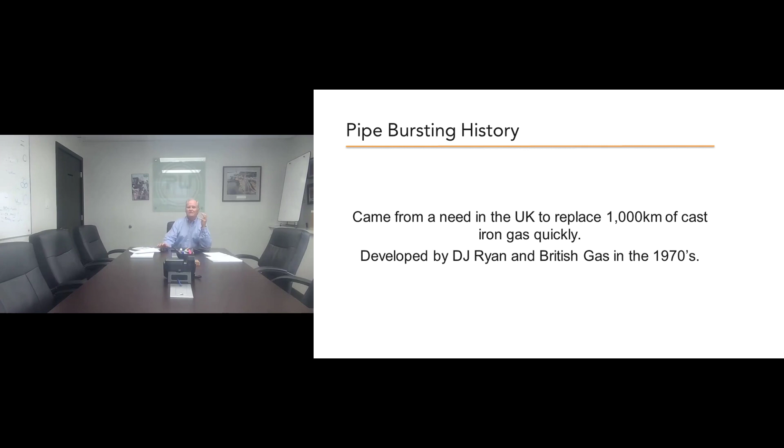Next slide. Caroline, I'm not seeing the slides. I can see them. Yeah, I can't. Okay, anyway, I've got them here. This is the second slide.

Bursting types and materials that can be burst. Okay, bursting type. So there's two basic types of pipe bursting that now exist.

Pneumatic and static. There used to be other methodologies called hydraulic, and there were chain systems. There were lots of different types of bursting, but they've tended to fall by the wayside. As I said, British Gas was the instigator of pipe bursting way back. And when I started in pipe bursting, we actually had to pay a patent fee to British Gas.

You can see on the right-hand side of that slide, there is a picture from TT Technologies, and it shows the various materials that can be pipe burst. Now, that statement is not quite true, because that list of materials there, the top one is cast iron, concrete, clay, reinforced concrete, and asbestos cement. Those can be pipe burst. Steel, truss, corrugated steel, ductile iron, and plastic really can be pipe split. And there is a difference between the two, and we'll talk about that in a few minutes.

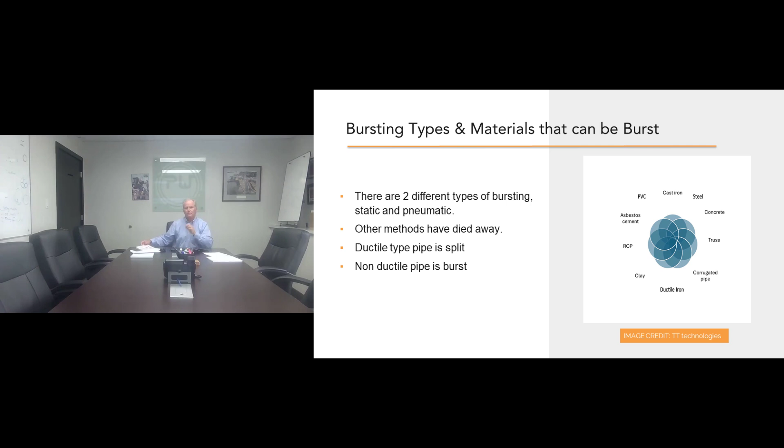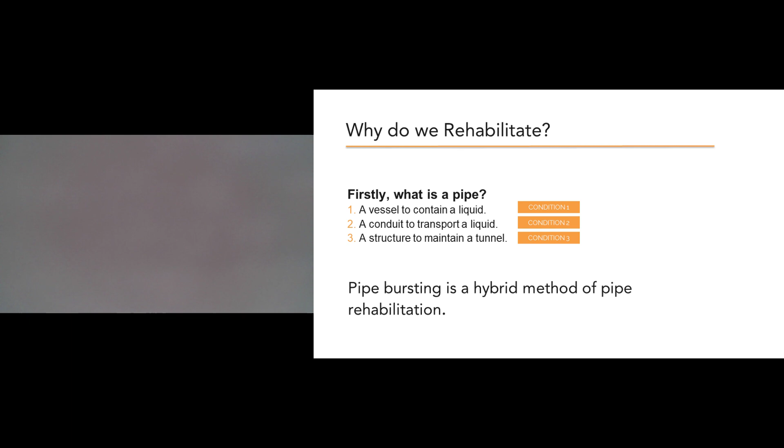Next slide. Alison, I do not see any slides here. I'm sorry. Sorry, David. Did you try to press the slides button at the top? We're on slide 10. Why do we rehabilitate? Yeah, I am looking at the... Sorry, Alison. That's okay. Ah, that's what I'm looking for.

Thank you. Why do we rehabilitate? Well, Alison and I were having a conversation about this a few minutes ago. First of all, let's go back and discuss what is a pipe. There are three conditions that I would consider paramount to looking at a pipe. First of all, it's a vessel that contains a liquid. That's the problem that British Gas had. The pipes were of sufficient capacity, but they no longer contained the liquid, or the gas in that case. So therefore, they failed from that point of view.

But the hole was still in the ground. There was still cast iron there. So it succeeded in conditions 2 and 3, but it failed in condition 1. Condition 2 I'm talking about is its ability to transport a liquid. In other words, is it big enough? And then the third one is a structure. It's a structure to maintain a tunnel. Does it have the ability to maintain the tunnel? That's more evident on corrugated steel pipes and large culverts, and also in clay pipes. Clay pipes tend to fail longitudinally. We'll talk about that in a few minutes.

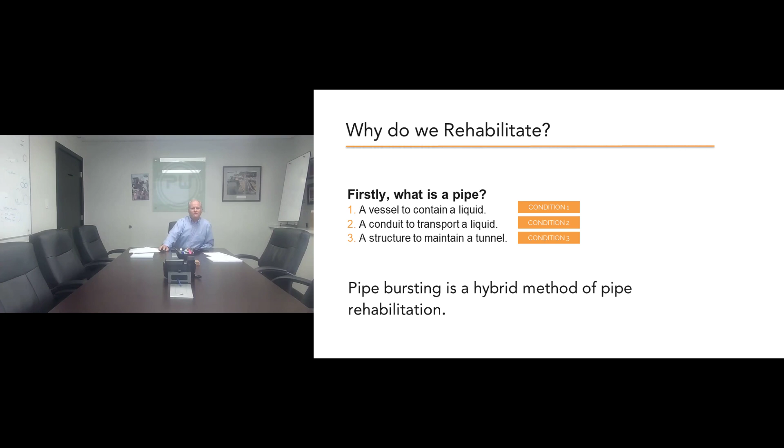So pipe bursting mainly deals with that second condition, which is the condition that the pipe is undersized. It solves that problem. If you want to go back to condition 1, which is the leaking, you can line the pipe with CIPP liners, or you can do sprayed-in-place liners, or you can slip line. There's lots of solutions for that. But mainly the only solution we really have for a pipe that's undersized is to pipe burst it. So essentially what we're doing is we're using the hole that exists in the ground and upsizing that hole.

Now when we talk about upsizing the hole, 25% is common, but the problem is 25% is a very small upsizing in hole. If you look at a standard upsizing, say 200 to 250, or an 8-inch to 10-inch upsize, that's a 50% increase in size. And if you're going 150 millimeters to 300 millimeters, that's a 400%. That's a very large upsize of the hole that you're trying to make. And that's assuming that the pipe itself is just going to shatter and move out of the way. Where you can run into problems is with the ductile type pipes, the steels and the ductile iron; they don't tend to shatter. So there are limitations when you're dealing with that.

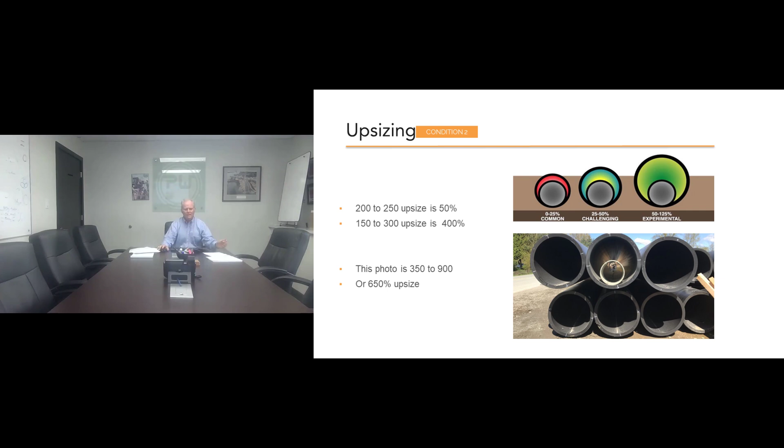The photograph on the bottom here is a project that was done recently in British Columbia, and it went from 350 millimeters or 14-inch up to 900 millimeters or 36-inch. So it was a 650% increase. That is conditioned on the ability of the ground above the pipe to take that energy and to take that compaction. If the ground cannot take the compaction, then you can't do that much upsizing.

And here's a slide we've developed in the last number of weeks. What I'm trying to describe here on the picture on the left is what actually happens. For starters, let me premise that we all know that geotechnical conditions or soils are very varied. All bets are off. You have to be very conservative looking at soils because it changes drastically going through a trench. But we can make some assumptions, and this is a fairly good assumption of what happens. If I look at the picture on the left, my existing pipe is the blue pipe on the bottom. The new pipe I'm putting in is the green pipe.

We have found in 25, 30 years of pipe bursting that very, very rarely do we not have inverts matching. In other words, the crown of the pipe is generally what moves. So therefore, the compaction happens above the crown of the pipe.

If you go back and you look at the trenches that were done, Murphy Pipelines puts them on quite often, you'll see guys digging trenches back in 1900s and 1920. None of that material was compacted. Therefore, the material that was put back in the hole or the trench on top of the pipe, I'm saying, would have probably compaction of maybe 80, 85% maximum. So therefore, it has an ability to absorb compaction, whereas the existing ground would have had a much higher density.

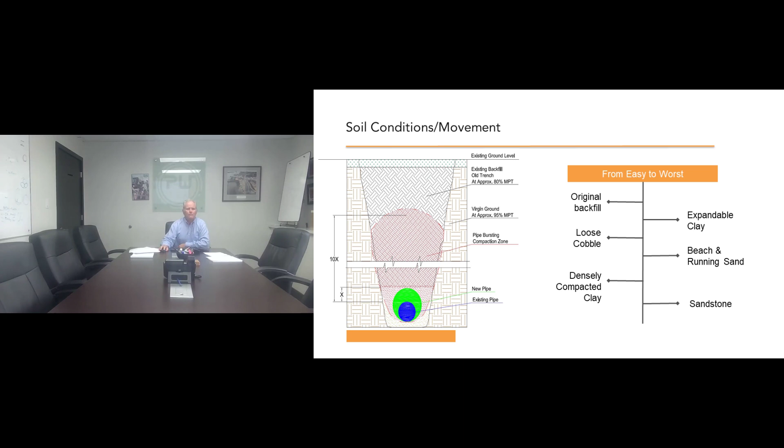When we pipe burst, and it doesn't matter whether it's pneumatic or static, you are using energy to do 3 things. You're using energy to break apart the old pipe. You're using energy to displace the soil that we just talked about now. And then you're using energy to pull the new pipe in through the hole that you've made by the cone when you've displaced the soil.

Depending on the soils and depending on its ability to move back around the pipe and adhere to the pipe and cause friction, you may or may not want to add lubricants in there to try and isolate the new pipe from the surrounding soils and allow that pipe to slide through. You cannot do much about the energy that you need to break apart the existing pipe, or you can, and I'll talk about that in a few minutes, but you can't do much about the soil, but you can do something about the lubrication and the friction on the pipe behind. So lubrication is a good example.

Now, generally on the smaller bursts, the 200 millimeters, even up to 300 millimeters, you generally have enough horsepower to pull through. It's when you start going 400, 500, 600, 900 millimeters, that's when you really need to watch how you use your horsepower, your pulling power, and try and lessen any areas that you can lessen to allow you to have maximum energy to both break apart the existing pipe and to pull in the new pipe, to make the hole in the ground for the new pipe to come through.

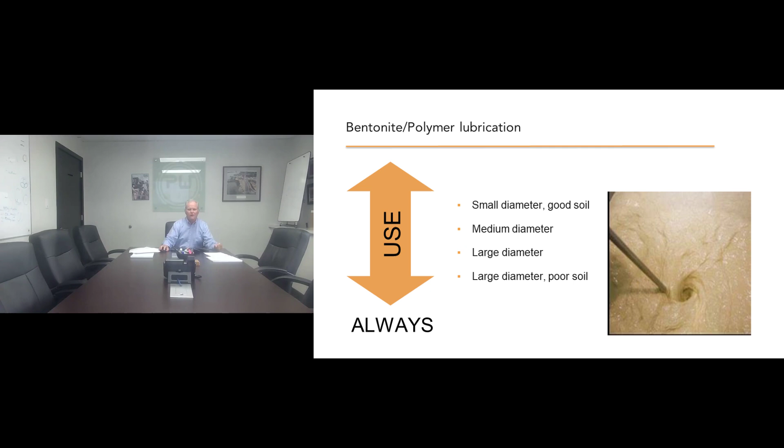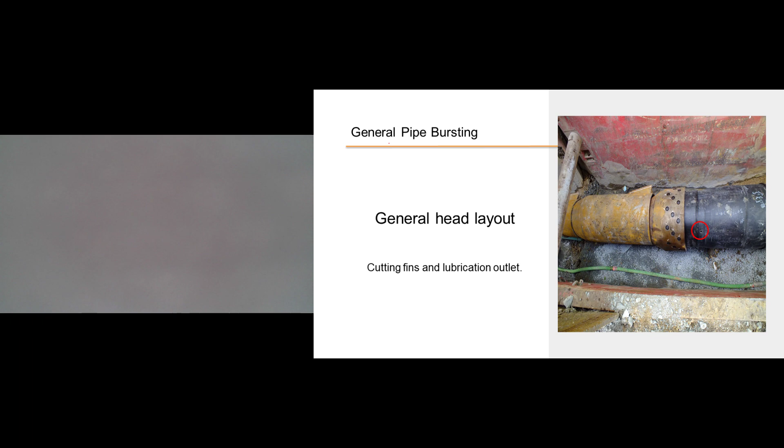So I'm still on general pipe bursting. I haven't deviated off into the pneumatic versus static yet. So this is the general head layout. What we've got here is the bursting head, and you can see it's steel cones. In this case, it's a static system. If there's a pneumatic system, there'd be a hammer inside that hammering.

I just talked about the energy to break apart the existing pipe. Here you can see the cutting blades on the top of that, over kind of on 1 o'clock. If you're looking at it from behind and looking up towards the front, cutting blades are at 1 o'clock. So by putting a cutting blade on there, you are cutting the existing pipe. Therefore, you're hopefully using less energy to cut the pipe and get it out of the way, and you're using most of the energy to open the hole up.

I've also circled in there a hole where the lubricant comes out. So that lubricant comes out just behind the head and will hopefully lubricate the whole new black pipe that's there and lower your friction on that.

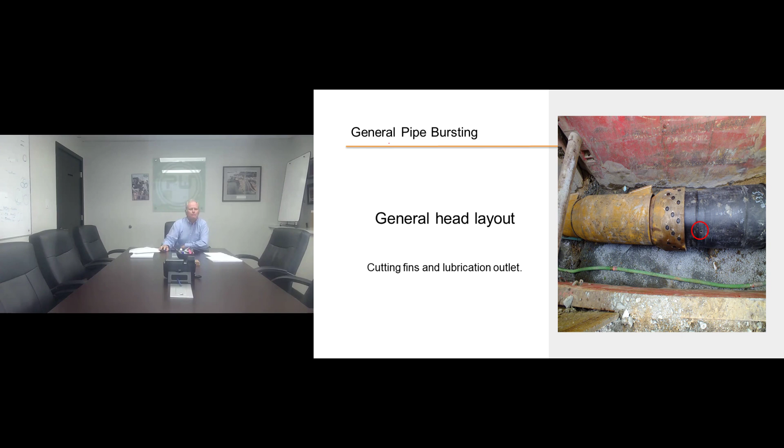Now we're going to get into the pneumatic process. Both processes are quite common. We tend to find that the pneumatic process is more common in the southern US, static in kind of California, and then the static system is more common as we come north in the US and into Canada. So the pneumatic system is a hammer. I'll give you an example of this.

TT Technologies has a tool called a Hercules. It generally can burst up to, say, 250 millimeter pipe. It's just a regular working tool because the vast majority of pipe that we're dealing with is 200, 300 millimeters, 250, that kind of size, which is 8, 10, 12 inch. That tool is, I'm going to guess, about 400 kilograms, 800, 900 pounds. There's a hammer in there that is about 150 pounds or 75 kilograms. It goes back and forth at about 70 strokes per minute.

When it hits the front, it's steel on steel, so there's a very sharp smack when it hits the front. Then as it comes back, the air channels are set up so the air slows the hammer down as it's coming back, and then it hits a rubber cushion on the back. Therefore, the net result is that, depending on the soil, the net action of that hammer is, say, 75 mils forward, 25 mils back. And so the air coming out of that compressor on the right-hand side powers that hammer to move back and forth at over a beat per second and move forward and break apart the existing pipe and push the soil out of the way.

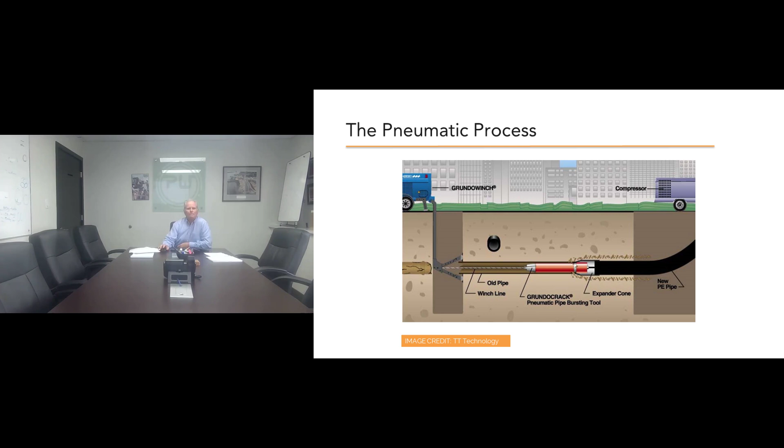So the pneumatic process, we go back and we've got the winch. It provides constant tension, as I said. So it's what we call a twin capstan winch. It's not a geared winch, because the hammer action will slow down and speed up depending on the soil there. So it can slow down and completely stop for a while and just hammer away trying to displace soil. If that was a mechanical type coupling onto a winch, you'd stall the winch out, which is not a good idea.

So it's a twin capstan thing that will allow slip depending on the tonnage you put on there. The winches out of supply, they've got 5, 10, and 20-ton winches. A 10-ton winch is what you'd normally use, up to, say, 300, 350 millimeter pipe. Above that, with the tools above that, you're going into a 20-ton winch.

Lengths of run, well, if it's a sewer system, generally your manholes are spaced about what used to be 450 feet apart, maximum, or 150 meters apart. That's still the case, and that's a general run for a sewer line. Pipe bursting, in similarity to pipe ramming and pipe jacking, you only have a gap outside the pipe of, say, 25 millimeters. Therefore, you're limited as to the lengths you can go. Once you go about 100, 150 meters, the material starts to come back in around the pipe and your friction starts to go up.

Whereas, a little bit off the topic, but directional drilling, you make a hole about 150% of the size of the pipe. That's why you can go 4 or 5 kilometers with directional drill, because the hole is much bigger. So you don't build your friction up as fast. But just a little side issue.

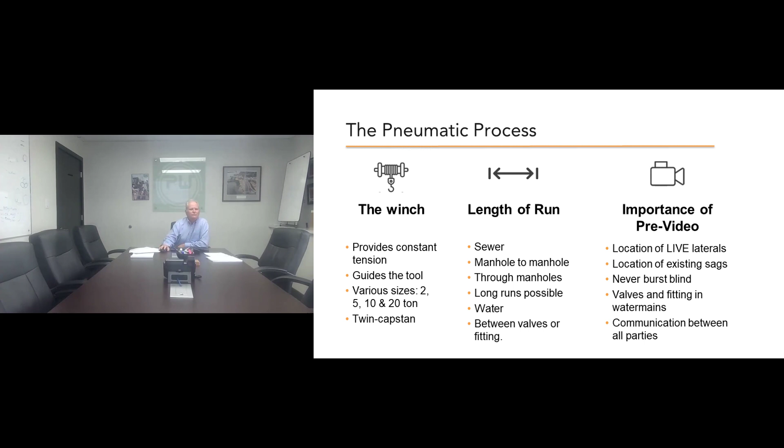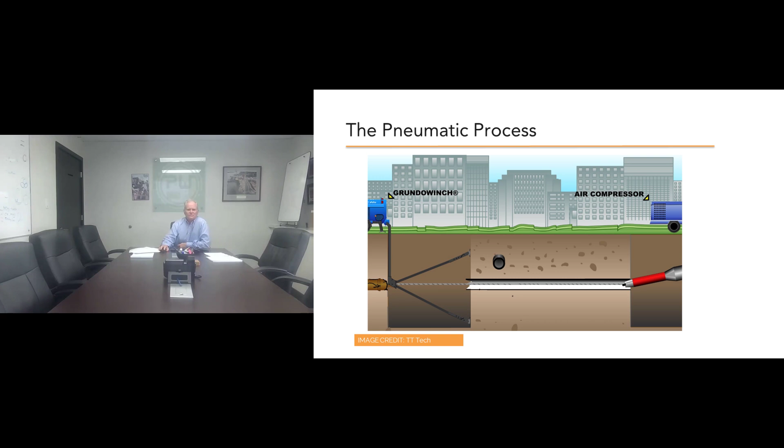Valves and fittings on water mains, I'll show you that. I'll show you what happens when you don't do that. And communication. Again, just looking at the pneumatic system, you see the same pipe bursting tool coming through. I'm going to call that a smart head in here because that's a pneumatic tool. Here we've got examples of pneumatic tools. I must say PW Trenchless hasn't used a pneumatic tool in probably 15 years. But these are old pictures that I dragged out.

So you've got the picture here. I hope you can see my mouse. So the picture on the left, you can see the tool as it's coming towards you. It's got a rear expander on there, and on the very front end, it's got cutting edges that will break apart the existing pipe. Back to what I talked about earlier when I talked about condition 1, 2, and 3. This is only to alleviate condition 2.

The existing pipe here was a PVC pipe. It was in great shape, but it no longer had the capacity because they were densifying this area, putting in high rises, replacing what were single-story buildings with high rises, and the sewage flow is increasing quite a bit.

I talked about the lengths of pipe bursting. Pipe bursting, like most trenchless technologies, is more feasible and more cost-effective when you can make longer lengths. Because your entrance pit and your exit pit are fixed, they're fixed costs, the longer the length that you can burst from pit to pit, the more cost-effective they become. Same as on CIPP, same as on slip lining.

Therefore, if I've got a run of, say, 20 or 30 meters between manholes, it's not very cost-effective to do the 2 pits. But in lots of cases, if it's a straight run with a manhole, I can burst right through the manhole. And that brings back my cost effectiveness again.

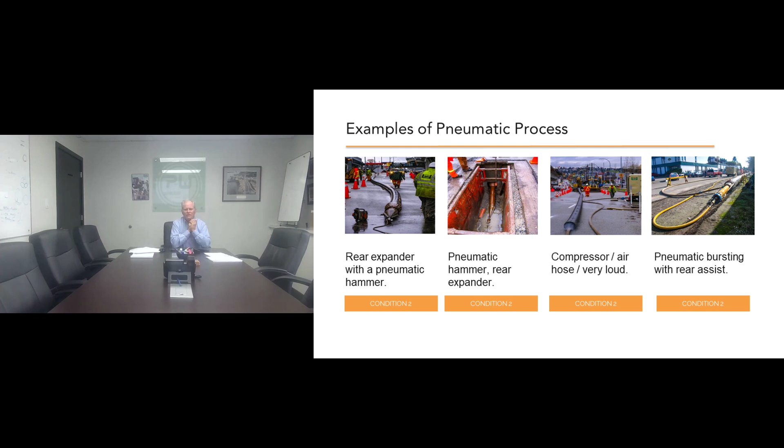An additional way of doing that was to put another bursting head on the back and be pushing from the back. A little bit like a locomotive on the back of a goods train, pushing on the back as well as pulling on the front. Same concept.

Here we're looking at a rear expander again. This is an interesting one. This is the first time we used that rear expander. This happened the day after 9/11. So I was hoping to get the technician from the supplier of the equipment up to help us make sure we had everything right. And he was stuck at the border. I always remember this day.

With pneumatic hard tools, you can burst from 95 millimeters, so it's 3.5 inches, all the way to 24 inches or 600 millimeters in diameter. And then new pipes, anywhere up to 1,500 will be pushing it. Probably 1,200 is the biggest we would want to get into.

Front expanders. Front expanders are systems with the expander on the front of the pneumatic tool rather than the back of the pneumatic tool. The big advantage is that in a front expander, you can burst into an existing manhole, take off the cone, and then reverse the tool back out the pipe. The disadvantage is that the tool itself is quite small because it has to fit through the pipe, and therefore your energy is not that great. But in certain circumstances, it works very, very well.

Here we're looking at a condition 1 and 2. So in this case, that concrete pipe was starting to fail because of sewage, with hydrogen sulfide.

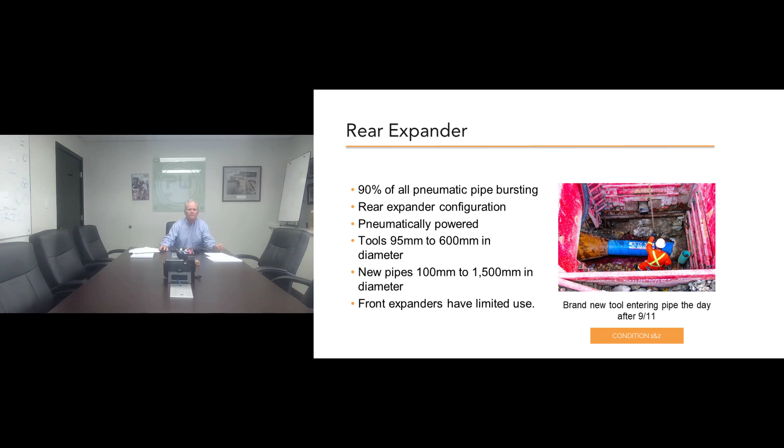Static pipe bursting. Static pipe bursting, like pneumatic pipe bursting, is just a way of breaking apart the pipe. So the top picture that you're looking at is we're feeding rods through. When we discussed the pneumatic system, we used a cable. The cable was only to keep the tool on line and in the pipe. It didn't really provide any pulling force to break apart the pipe. All of the energy to break the existing pipe and to open up the hole in the ground was provided by the pneumatic tool.

In static bursting, the cone on the front of the pipe is just a dumb cone. It's just a steel cone, and in the shape of a cone, it has no energy. It cannot produce any energy. All of the energy to break apart the pipe and to open the hole up has to come from these rods. So they use a rod system. A cable system would not be strong enough. A cable would stretch too much.

As I said, on the pneumatic system, you're 10 tons, maybe 20 tons. This one here, you're pulling at about 80 tons. So a big difference in pressure. And 80 tons is for your 200 millimeter, maybe up to 300 millimeters diameter pipe, so 12-inch pipe. You're limiting out with an 80-ton machine on a 300 millimeter pipe.

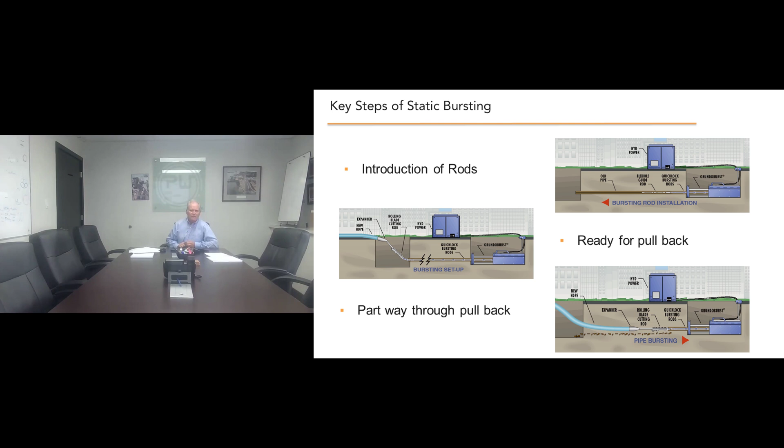And then behind that you've got the cone, which opens the dirt up, and then you pull your new pipe in. So the key points of static are it's just a straight pull system. The head is dumb. It has no ability to do anything. But they're all hydraulically operated. You have this roller cutting split blade system on there, which will cut the pipe out of the way. And it's a quick rod system. In other words, you're not screwing and unscrewing rods. It just makes it faster. Just couples together.

The one thing I will say about static systems is they're much easier. You don't have a compressor. You don't have air hoses. You don't have a starter valve. You don't have a pneumatic tool that you're trying to get a hammer going, all that kind of stuff. So it is easier setup.

The other thing I spoke about a few minutes ago was with the lubricant, is that the material moving back and around. If you are underwater, in other words, you're below the water table, because the pneumatic system tends to go forward 75 and then back 20 and forward, back and forth, it tends to vibrate the soil around it. And of course, that causes your cohesion in the soil to be broken, and the soil moves back in around the pipe much more easily. So if you're below the water table, you tend to bring the soil back around the new pipe much more quickly, and therefore you build up your friction much faster.

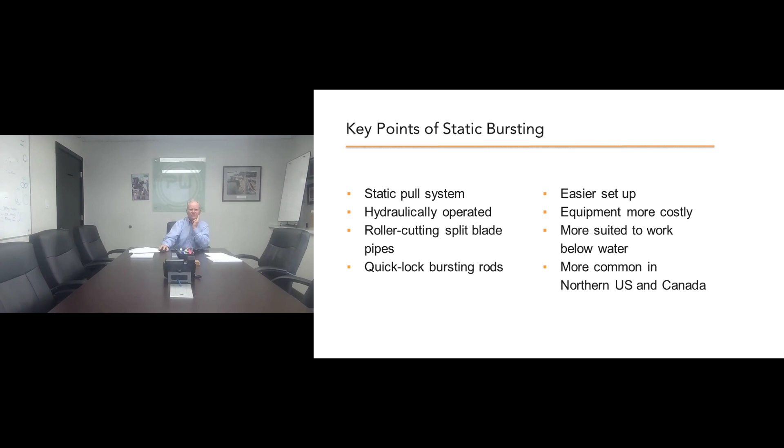Static system doesn't tend to do that. It tends to open the hole up, and that hole stays open much longer. As I've already said, static tends to be more common in northern US and Canada for some reason. Don't know why.

Here's pictures of your static system. You can see there on that picture on the left, the head is just a dumb head, just a cone in there. It's got the rod sticking out. You will see here, in this case, it's the city of New Westminster here in British Columbia. They have a lot of old clay pipes that were put in in the 1900s, but they have failed longitudinally. So they've failed along the spring lines. And then it's not a big movement from there for them to move laterally, and then you've got a failure in there. So these pipes have failed, and that's why I'm saying it is 1 and 3. So 1 is that they're leaking, and they've got a lot of I&I, and 3, structurally they've failed.

Those conditions could be solved as well with CIPP. They didn't have to burst that, but the cost effectiveness of CIPP versus pipe bursting, depending on the runs and depending on the contractors and so on, it's not that different. It can be 10–15%. But you can see the effectiveness of trenchless as well. They pit on both sides. There is only 3–4 meters long, and then you're going to have another same pit at the other end, 3–4 meters long, and you're going to be able to effect a 100-meter run of pipe and change it overnight. And then you're going to have your lateral connections coming in. An average lateral connection, you'll see later on in the video, is only the size of the hood of a pickup truck, so not very big at all.

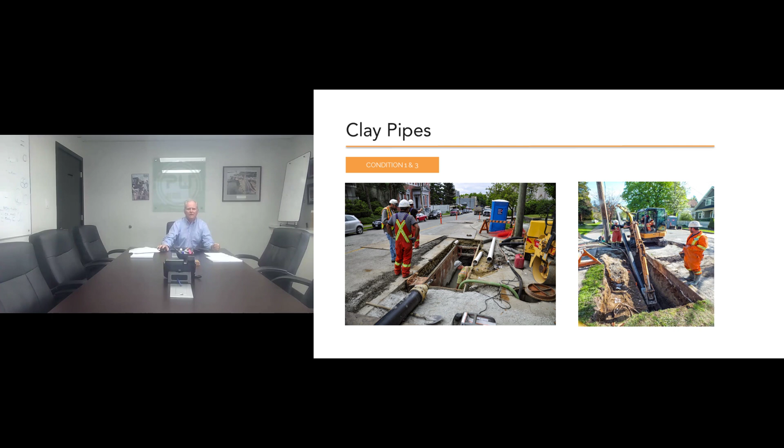Here are 3 or 4 different pictures of static bursting. So on the left-hand side, you've got a large bursting head. You can see the person on the right-hand side, that cutting wheel, and in fact, it really demonstrates the cutting wheel in the second slide. So it's splitting ductile iron pipe. You can see the wheel sticking up out of the pipe as it's splitting apart the ductile pipe.

You will also notice on the ductile pipe that it is not breaking into shards and pushing out of the way. What it's doing there is it's cutting the top of the pipe, and then the pipe is kind of failing at about 9 and 3, and that's moving out of the way. But what's staying there is from 3 down through 6 and back up to 9 o'clock. That pipe is not failing. So you have to be aware of that when you're bursting pipe, particularly ductile iron pipe. You're very limited on the upsizing you can do on it. The recommendation generally is 1 size up.

Other than that, you will tend to affect the new pipe that you're pulling in. In that one, I'm talking about conditions one and two. So obviously in that one, they had leaks in that ductile iron pipe. Well, that's actually a demo. But if you have leaks in the pipe and you're undersized, then you would burst. On the one on the left, it was a large upsize. In that case, the existing pipe was in great shape, but it was too small. So therefore, that's a condition two that I talk about.

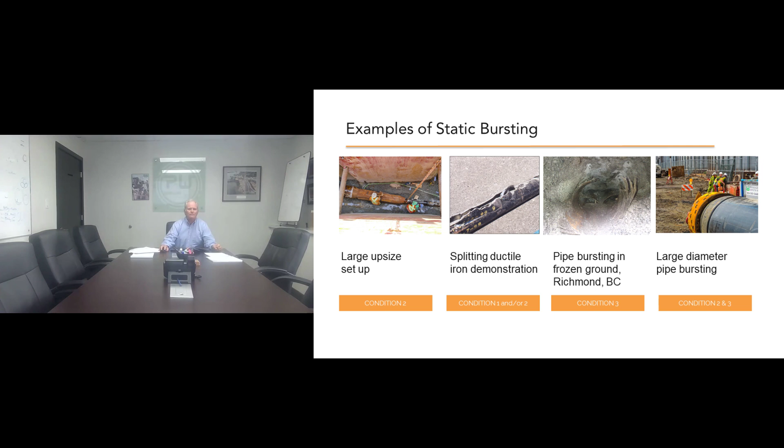So I'm going to talk about the risks involved with pipe bursting. Pipe bursting is one of many, many solutions in trenchless technologies. And it solves the problem, as I said, when our capacity is too small, or we've got a failure in the pipe. If you've just got a leak in the pipe, or you've got cracking in the pipe, CIPP is a better option. So it does solve one problem. You're identifying that problem, of course, with the video beforehand. You've got to watch for your connections.

And a lot of times, the reason you're upsizing a pipe is because we're densifying a neighborhood. Well, if we've already had 20 residential houses on that street, and we're now abandoning those and putting in multifamily or high-rise, we've now generally got one connection out of a multifamily complex or a high-rise complex. Therefore, all of the 20 houses that existed have had 20 connections coming into that pipe. We don't want to reconnect those 20 connections.

Invariably, the connections were not severed at the main, they were severed back at the property line. So you have to generally go in with a lamp camera and verify that those connections are abandoned, because they look still live, because they will have some groundwater coming through. So you need to verify what's happening.

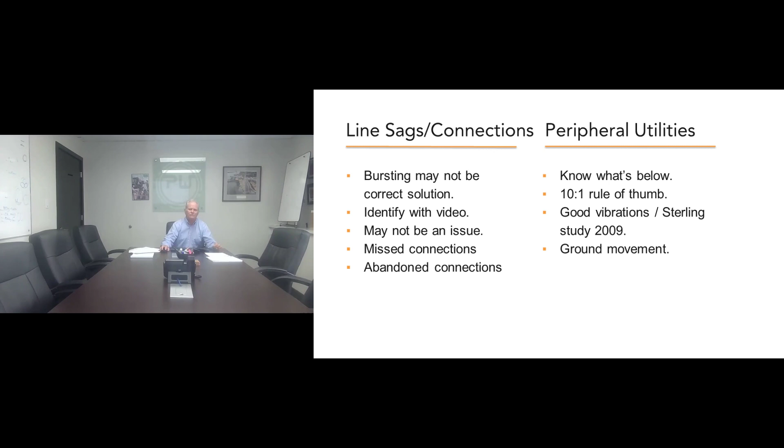Remember, most of the time when you're repairing or replacing a water main, it is because you've already had a number of breaks in that water main, and you finally just lose patience and say, okay, forget it, we're going to replace this whole water main. We've had enough breaks. This is stupid. We've got to replace this whole water main. But when you do that, invariably, you will have had repairs in there.

So even if the main material of that water main was, say, asbestos cement or steel, the repairs that would have gone on there, they wouldn't have used steel, they would have used a different product. We need to know what that product is, because if we're trying to cut the existing pipe, we will use certain tools to cut that pipe. If the material changes, we will use different types of cutters.

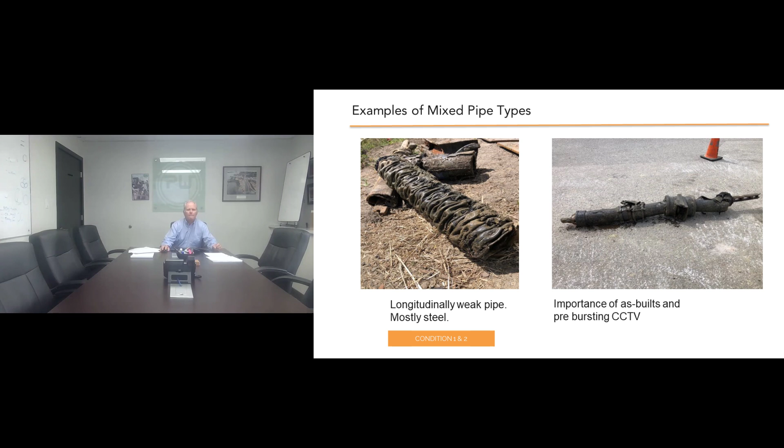So the owner's responsibility and the contractor's responsibility, these are just kind of basic guidelines. If one does that NASTT course or similar pipe bursting courses, the 2-day-long courses, you will find out an awful lot more on what needs to be looked at from an owner's point of view and the contractor's point of view to present a good contract and then to get reasonable and accurate pricing back in from the contractors. So number one, as I said, the material, the pipe type you just saw on the previous slide, when we didn't know that the repairs were in there, that's what can happen. You can get into a mess.

Bypass pumping in sanitary sewers, very, very common. Bypass pumping, it helps for the owner to have a very good idea of what is required to bypass. Otherwise, the contractor has to assume the worst. So they make some calculations based on the diameter of the pipe and what's the maximum that can flow through there, versus the actual flow through there might only be half or a third of that. You don't need to overpay for bypass pumping.

The legal issues, well, I'll show you later on. We do a video where we're actually bursting through the backs of people's yards through easements that, yes, legally existed, but mentally all the homeowners had totally forgotten about. And so it is beneficial for the city to go in ahead of time to the owners of the houses and explain to them, there is an easement in here. We're just replacing your sewer system. This is what's going to happen. If you leave it to the contractor, it's just too late at that point.

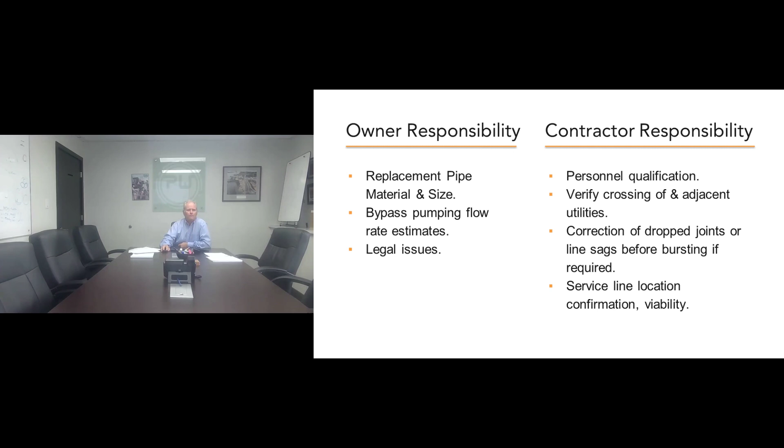This is just a brief idea of some of the submissions to be submitted from the contractor. The methods of bursting: it's good that the owner sees what the contractor is proposing to use. If the contractor is coming back and they're proposing to use pneumatics and you're 3 meters below the water table, I know it's the contractor's responsibility, but it will tell you their knowledge and their expertise. And that, again, the type of tool. Again, if they're trying to do a 16-inch or 400-millimeter pipe burst with an 80-ton pipe bursting machine, you can certainly question their ability to do the work.

And I would recommend that you do not just go out for tender with these things, but you go out for an RFQ, and so that gives you the ability as the owner to question the contractor before you make an award. The type of lubricants, the MSDS on the lubricants: they are putting these lubricants into the soil. You as the owner want to know what's going into your soil. You want to know if there are issues with them from an environmental point of view or not. And again, the proposed runs. By asking these questions, you're forcing the contractor to think. So you're making sure that the guy is just not going in blind to do it.

The contract plans, again, the lengths of each burst. You don't want to have on your contract drawings a burst of 300 meters. It's just not going to happen. You need to know that the bursts are going to happen in 120, 140 meter lengths maximum. Again, the construction easements, that's back to the legal side of things again, bypass system, the layout. The bypass system, there's liability from the contractor. There's also liability from the owner about bypass systems. You certainly don't want a major spillage. And then your exit pits.

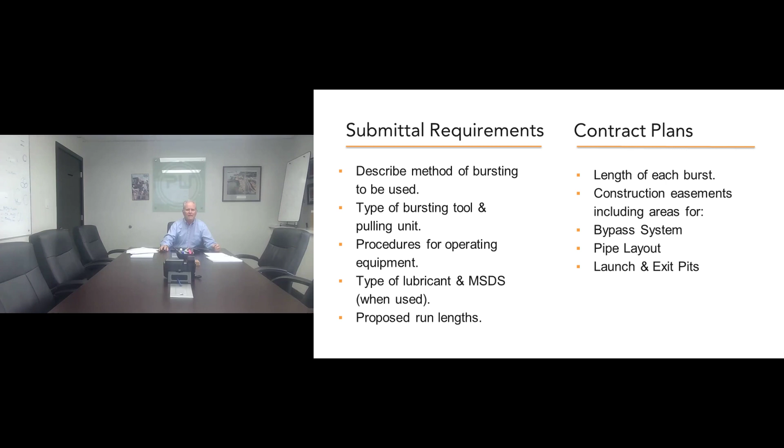So we're into case studies. We're into the last 3 or 4 slides, folks. This was a condition 2. So the pipe was too small. There is foreshortening on this photograph, so it does exaggerate the new pipe going in. But you can see this is a major upsize. That existing PVC pipe was a 350 pipe, and the new one going in is the 900 millimeter pipe. And if you look at the very front of the bursting head, you will see those cutting wheels on there. So that cutting system is set up so that it doesn't allow essentially the PVC pipe to get away. It holds it in place with a mandrel on the inside to maintain its roundness, and then hits it with the cutting wheel to split it apart.

Then the other thing that's unique about this layout is that the material, because it had a high water content, we essentially hit it with the first cone, moved the material out of the way from, say, 450 to about 600, and then we let the soil relax and essentially let the pore pressures come back into the soil around the pipe again and lower your friction. That's where the barrel section is. Then hit it again with a cone, move the soil out of the way to about 650, 700 millimeters in diameter. Again, let it relax with the second barrel section, and then hit it with the last cone to move it out of the way to about 1050 in diameter, and then added the lubricant in it to bring your black pipe in, which is the new pipe coming in.

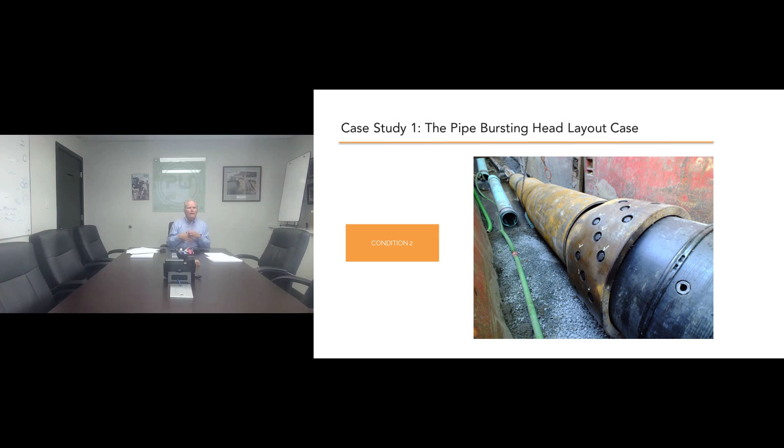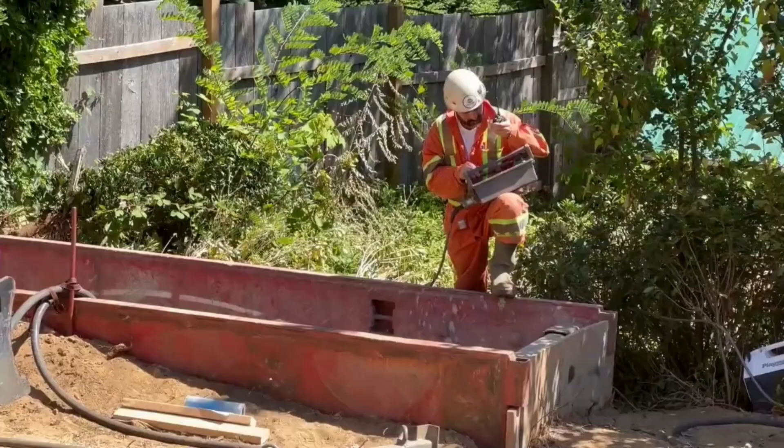Trenchless technology is a rapidly growing sector of the construction industry and includes different methods to replace underground utilities that require fewer excavations and no continuous open trenches. Pipe bursting is one trenchless method where hydraulic force is used to split the old pipe from the inside, while a new replacement pipe is pulled in behind.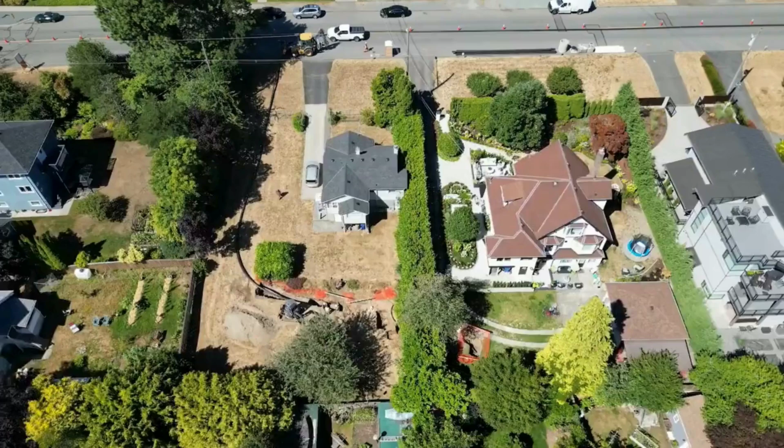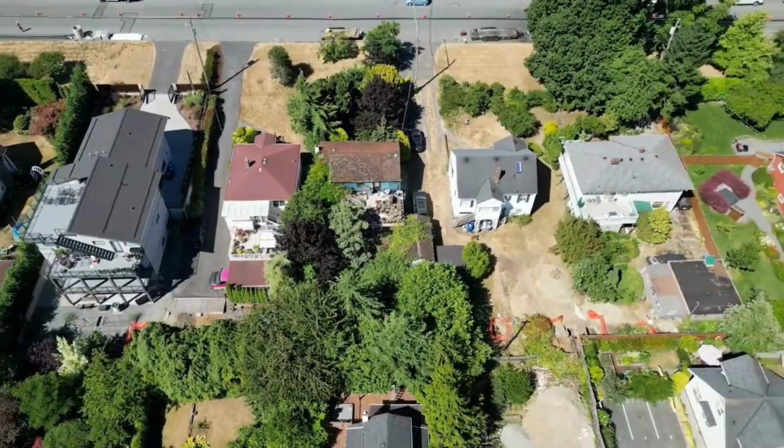Pipe bursting was used to upgrade a backyard sanitary sewer along Vancouver Avenue. The existing 150mm diameter concrete sewer was installed in 1959 and runs along the rear of the properties, seen here where the orange safety fencing is installed around each property connection to the sewer. Given the access challenges, mature vegetation, and proximity of existing structures, the impact of the traditional method of digging up the entire sewer was not preferred.

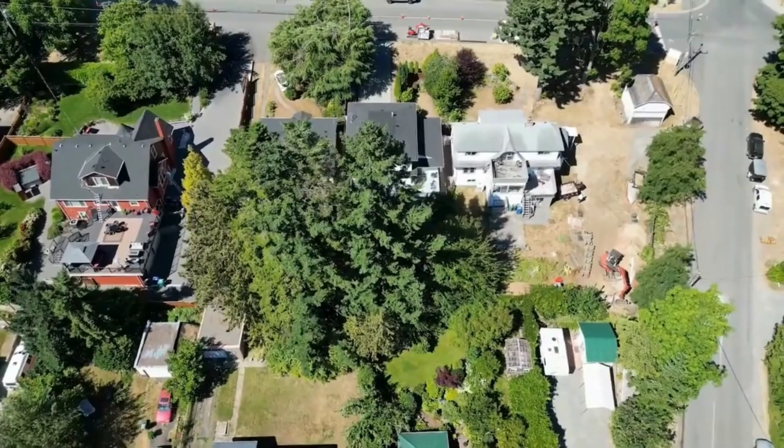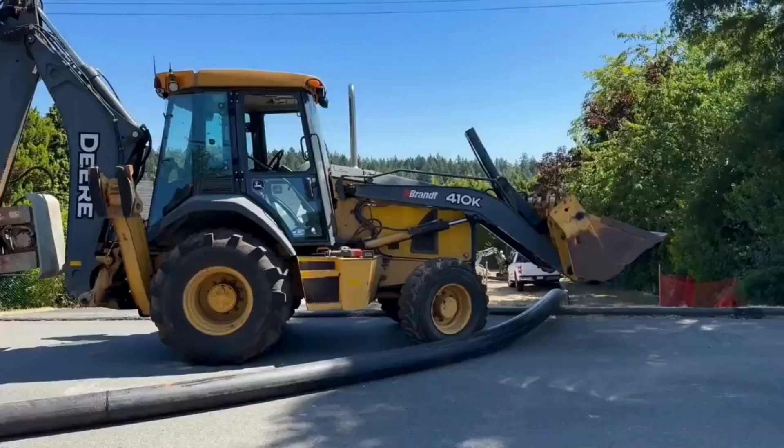The existing pipe material and soil conditions were evaluated and both supported the use of the pipe bursting process to replace the old sewer line. The new sewer line is a continuous piece of 200mm diameter high-density polyethylene pipe, approximately 215 meters in length. This is laid out along the roadway and set up for pullback using vehicles and other stationary objects to provide the appropriate bending radius and grade of the pipe at the upstream entry point.

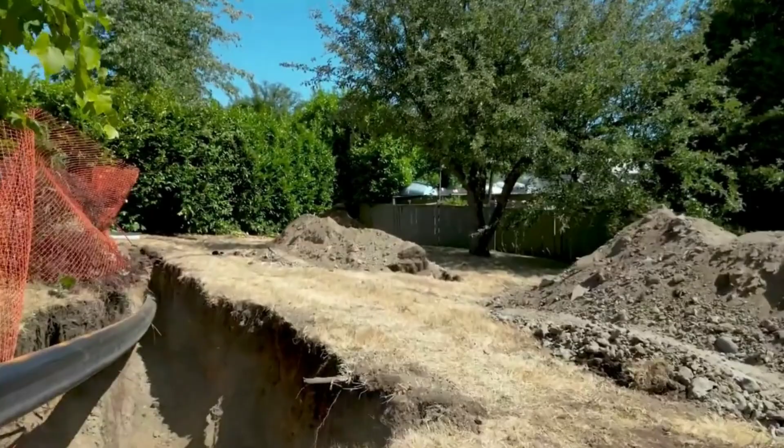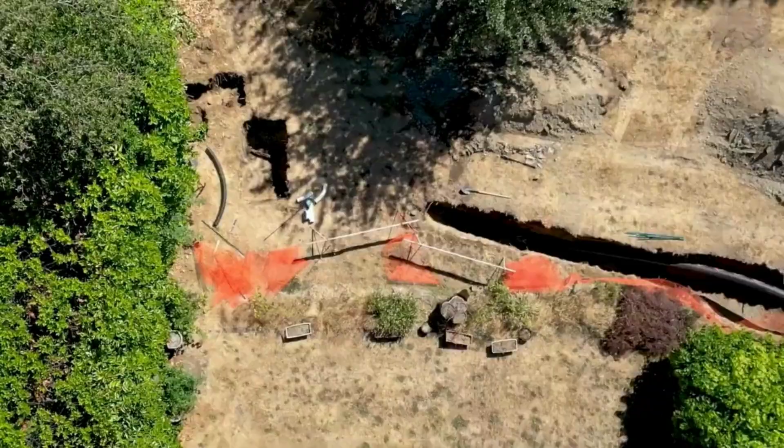This is one of the few excavations that does require some space and is set up to accept the new pipe so it can be monitored during the process while it is pulled back into place. This process only requires that services to each property be excavated, including the entry and exit pit. The service pits are excavated prior to pipe bursting, and temporary connections are installed to protect the private side service from any damage. Once the new pipe is pulled through, the services are reconnected and excavations backfilled.

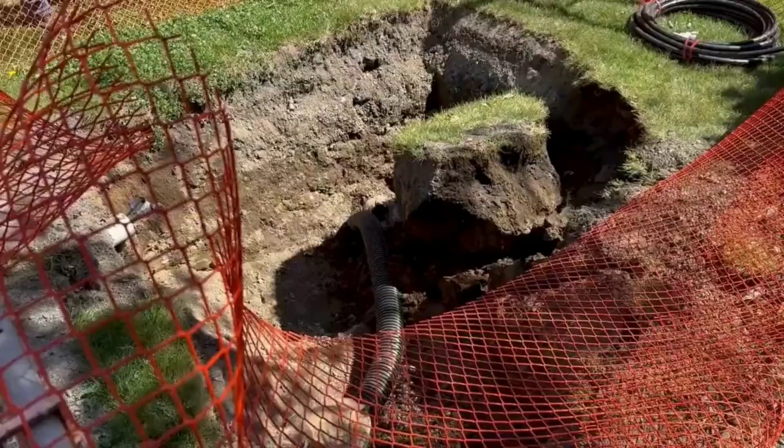On Vancouver Avenue, the entire section of sewer was installed in just one day, with the project taking only 10 working days to complete from start to finish. So this is the impact just a few hours after the burst. So you can see we've made the connections. That's the size of the connection from each house. As I said, about the size of the hood of the car, hooked onto the pipe. And that's the after effect. In fact, that one there, they replaced the connection right up to the house for those homeowners because it was failing. It was ready for sod.

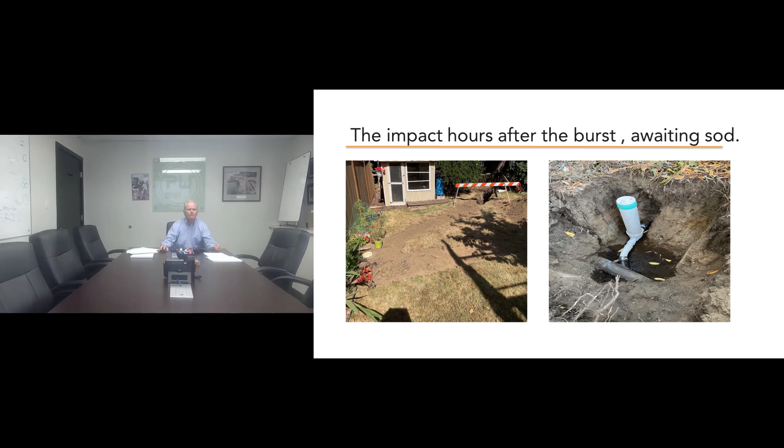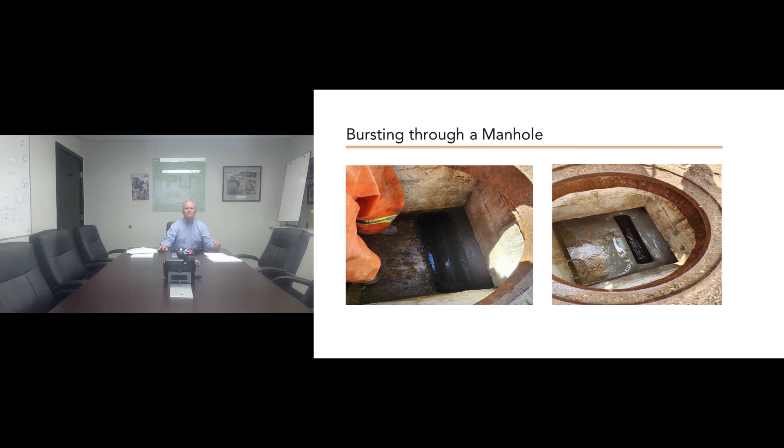I'm getting a message, lost network. You should be back. Hi, everybody. I think David's having some technical difficulties on his end, so we're just at the end. I'm hoping that he jumps back on soon. We're trying to figure out what his problems are. I've seen a lot of questions come in, and that is just fabulous. A lot of these are really good questions.

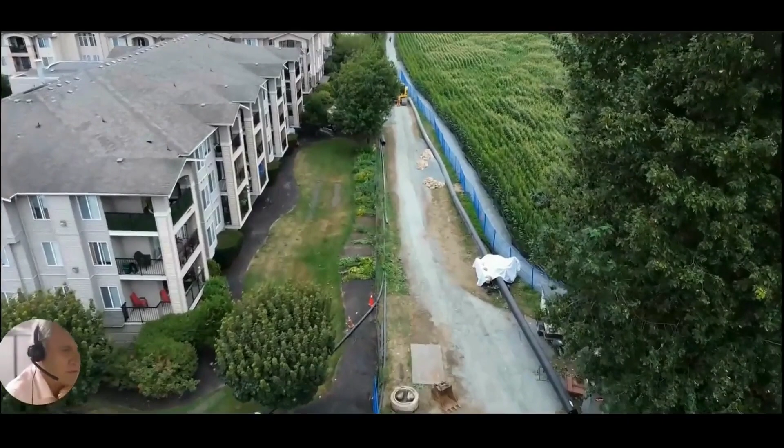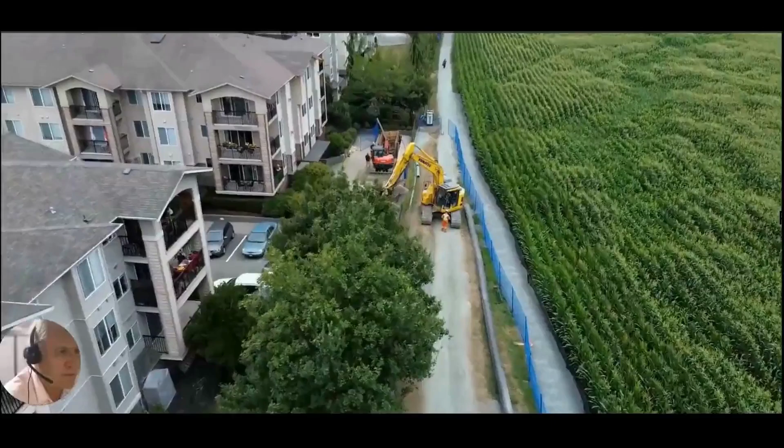This is a project in Coquitlam, just east of Vancouver, up against the mountains. This is the upsizing of an existing 300mm pipe that is being upsized to 450 millimeters. It's a trunk line that serves a lot of development going on in this area. There are three runs in this contract, about 500 meters in total. This is the first run going in.

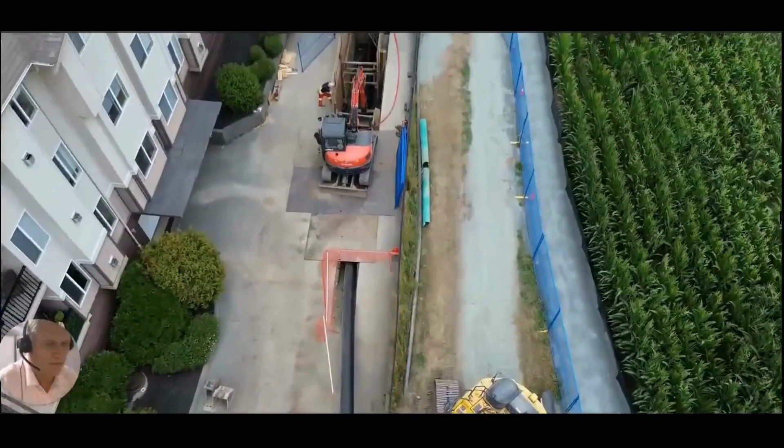It's bursting uphill. This is the entrance pit here. Pipe is entering here, going under that tree, past the vac truck, and bursting uphill, up through underneath all that grass. To have open cut this would have meant the removal of all of those trees, and it made a right mess in their garden. In the meantime, it's going up to this pit up here where the tugging unit is.

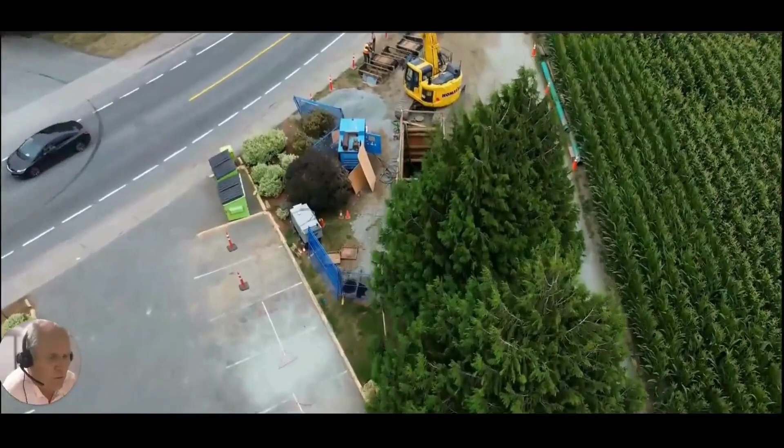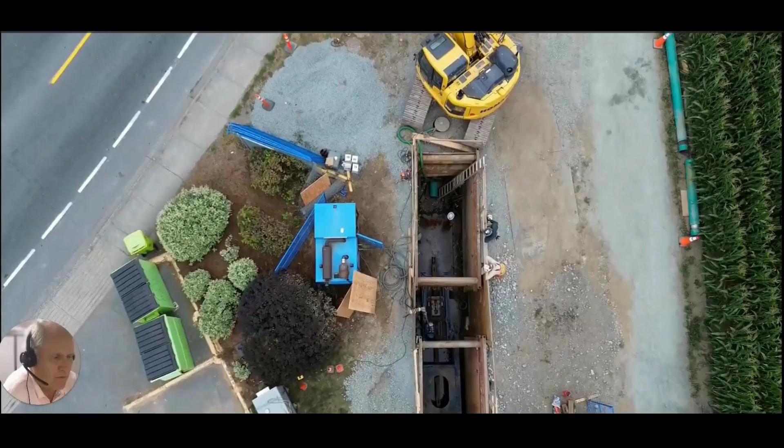So the tugging unit is here. It's a rod system. It pulls a bursting head through the existing PVC pipe with the new pipe attached onto the back of it. You can see the stub of the green pipe underneath you there. That's the stub of the existing pipe that's going to remain and be hooked up into the black poly pipe when we're finished. Just going to turn around here and go back down and have a look at this job again.

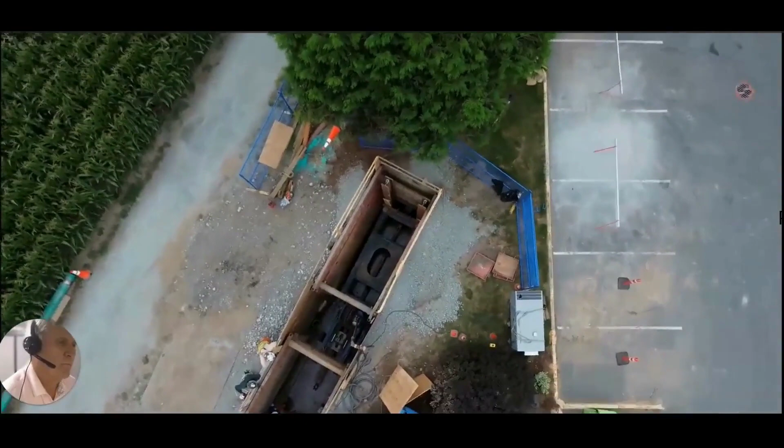So we're heading back down. Again, all those trees would have to be removed if we were open cutting this job. As we go down here, we see this vacuum truck. This vacuum truck is picking up the flow coming out of that apartment building on the right hand side. This has to be done when you're doing the actual burst, because of course your pipe is disconnected at that point and bypassed. The smaller black pipe that you see going through here is actually a bypass pipe, because you have to bypass these runs while we're working on the main trunk.

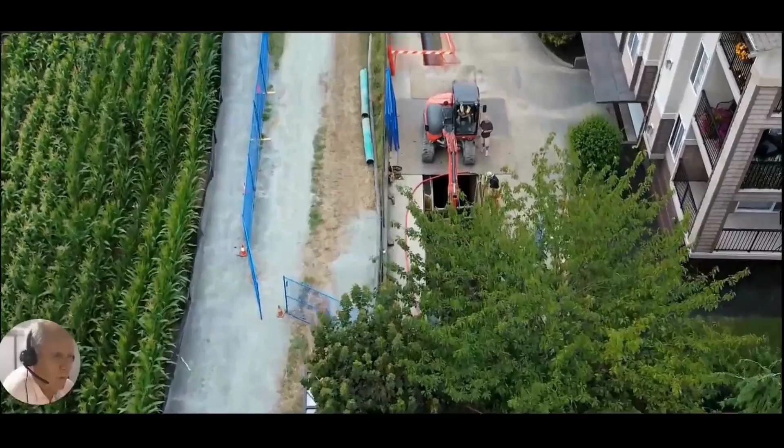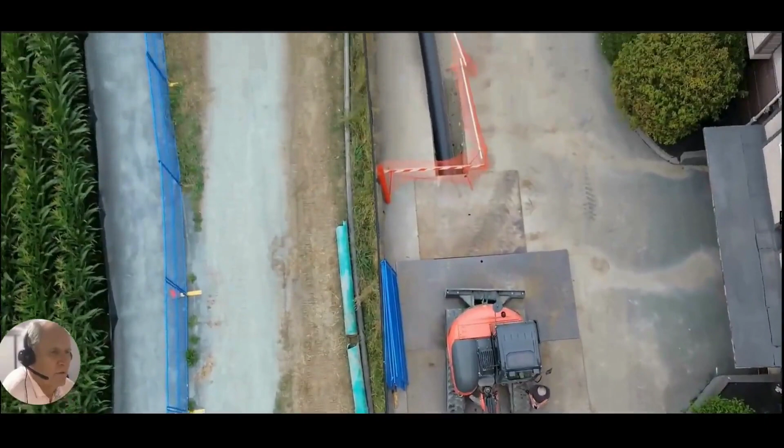This pit here would act as an entrance pit for the next burst going through the other direction as well. So one pit will act both ways. And then as we come up here, we look at the area with the steel plates. That's where the sewer connection is from the other building. Those plates will be removed, and we'll have the vac truck there when we're doing the next burst.

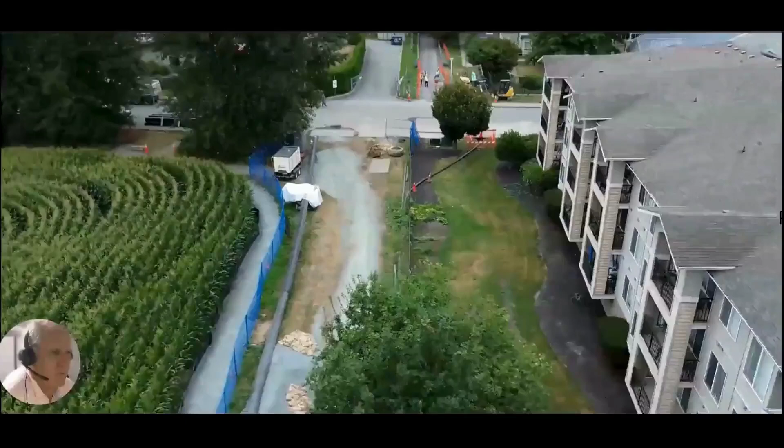That next burst will go underneath these oak trees, through that garden, and up into that pit right there. Then the third burst will go from that pit all the way through that pathway and off into the distance, about 120 meters. So these three bursts make up about 450-500 meters in total.

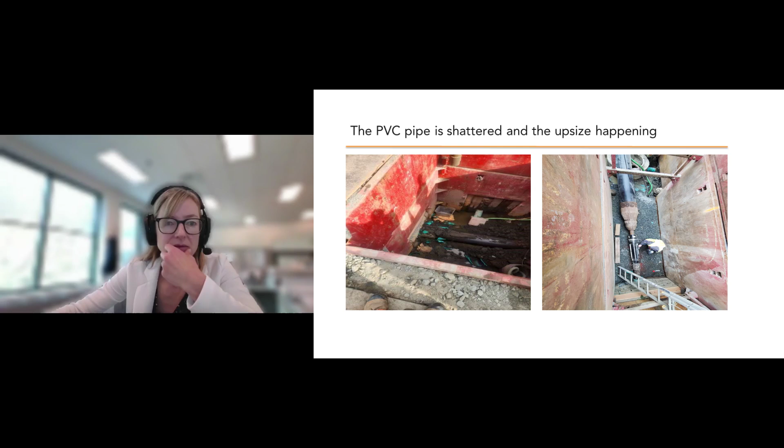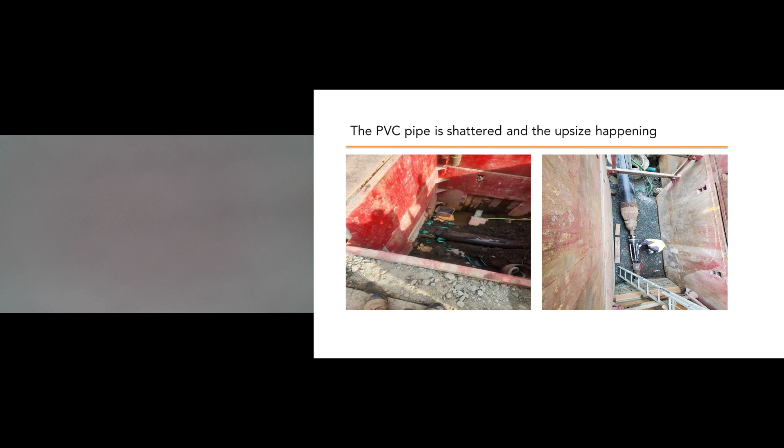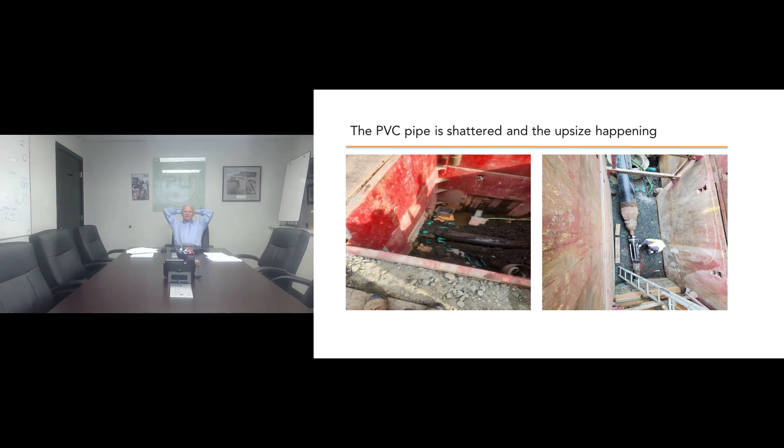The PVC pipe is shattered and the upsize happening. Yep, exactly. That's that third or fourth slide that we had when I talked about materials: some burst and some are ductile. You can see that PVC is kind of a hybrid system. It will tend to shatter and burst like pieces of concrete or asbestos cement moving to the surrounding grounds, but sometimes it doesn't. It's got some ductility in it. And it's a function of the age of the pipe; sometimes it'll break and sometimes it doesn't. So you can see on that slide on the left, the plastic is breaking apart.

On this picture on the right, again, you see that cutting head there right in front of the guy. It's got that wheel on there. He's got his hand on that cutting wheel. So that cutting wheel is putting a point load on the plastic pipe or the steel pipe. It's cutting it, moving it out of the way, and then the cone coming in behind is where the energy is really being expended to open the hole up in the ground, and then you're pulling your pipe in.